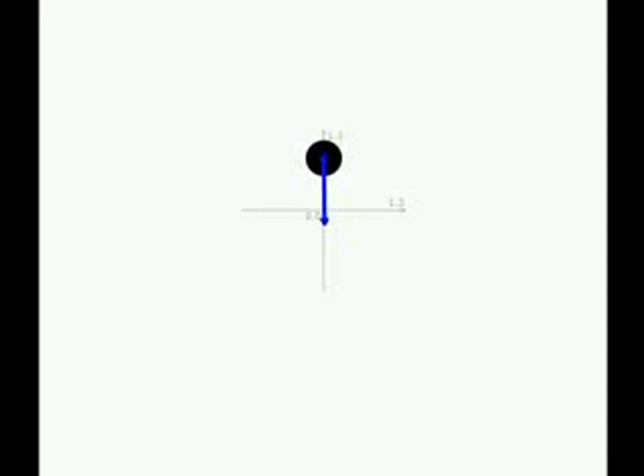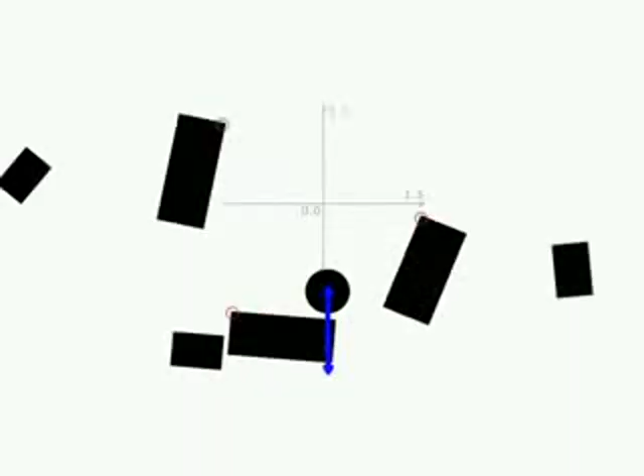Anything at an elevated height has gravitational potential energy. If it falls and none of the energy is used for other things along the way, all of that energy is converted into kinetic energy, the energy of motion, and we call it freefall. If any of the energy is used for other purposes, there will be less kinetic energy, so the fall will be slower. In the case of a falling building, the only way it can go into freefall is if an external force removes the supporting structure.

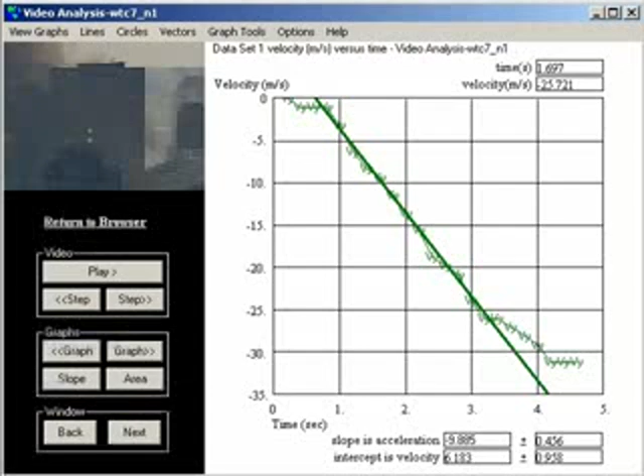None of the gravitational potential energy of the building is available for this purpose, or it would slow the fall of the building. The fact of freefall by itself is strong evidence of explosive demolition, but the evidence is even stronger than that. My original analysis looks like this. I have since confirmed my measurement using a different software package. Both of these graphs plot velocity versus time. A straight line indicates constant acceleration, and the slope of the line indicates the rate of acceleration.

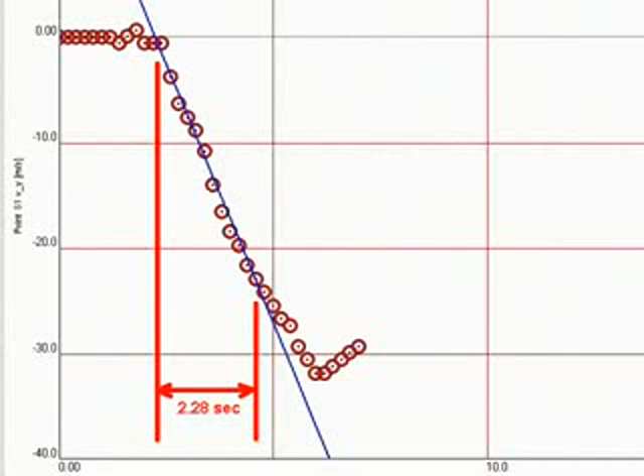What is particularly striking is the suddenness of onset of freefall. The acceleration doesn't build up gradually. The graph simply turns a corner. The building went from full support to zero support instantly. NIST's graph is upside down relative to mine, but that's really not an issue. Their data is almost the same.

What is dramatically different is the curve they superimpose on the data. This curve has no physical significance whatsoever. It is merely a hypothetical interpretation of the data. It is literally the mathematical equivalent of laying a wet noodle on the graph and nudging it around until it fits the data. The straight part fits the data reasonably well. What is totally misleading are the gradual transitions into and out of freefall. The raw data speaks for itself. One moment the building is holding, the next moment it lets go and is in complete freefall.

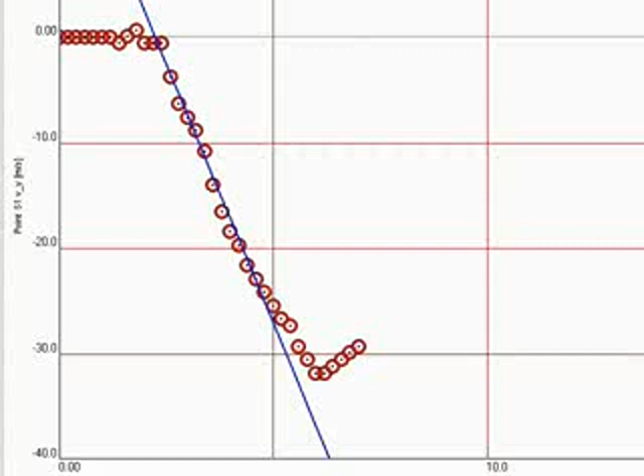The onset of freefall was not only sudden, it extended across the whole width of the building. My measurement of the acceleration of the building was based on the northwest corner. This recent measurement confirming freefall was based on a point midway along the roofline. The fact that the roof stayed level shows the building was in freefall across the entire width.

The collapse we see cannot be due to a column failure or a few column failures or a sequence of column failures. All 24 interior columns and 58 perimeter columns had to have been removed over the span of 8 floors low in the building simultaneously to within a small fraction of a second, and in such a way that the top half of the building remains intact and uncrumpled.

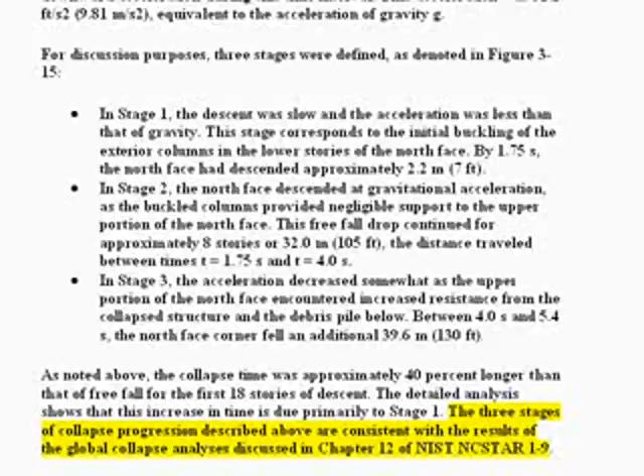Let's come back to NIST's acceptance of freefall. Here is their exact wording. Quote, "The 3 stages of collapse progression described above are consistent with the results of the global collapse analyses discussed in Chapter 12 of NIST NCSTAR 1-9," unquote. In other words, they're giving the appearance of claiming freefall is okay, but actually it's the 5.4 second duration of their 3-stage analysis that matches their model.

But we saw in Part 2 of this video series that the 5.4 seconds depends on an artificially early start time, which has no valid observational basis. Without the 5.4 second fig leaf, they are left with freefall and nothing more. NIST does not show how freefall is consistent with their hypothesis, because, as Shyam Sunder has correctly and eloquently explained, freefall for a naturally collapsing building is impossible.

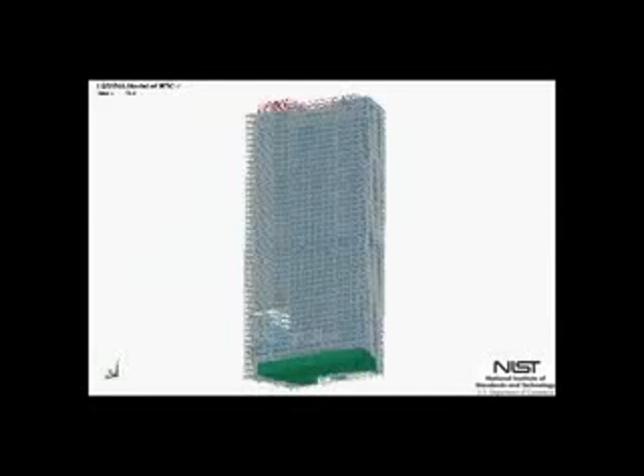This brings us to their computer model. NIST's so-called investigation actually consists of finding a way to reproduce the mysterious collapse of the building using a computer model.

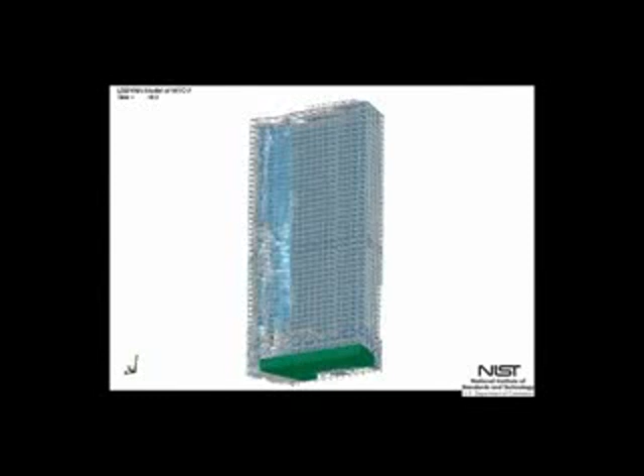The assumption is that if the computer model can be made to reproduce the observed collapse pattern, that must be how it happened. The problem is, if something unexpected was going on, like explosives for instance, you're not going to discover it in the computer model. For that, you need to look at the actual evidence.

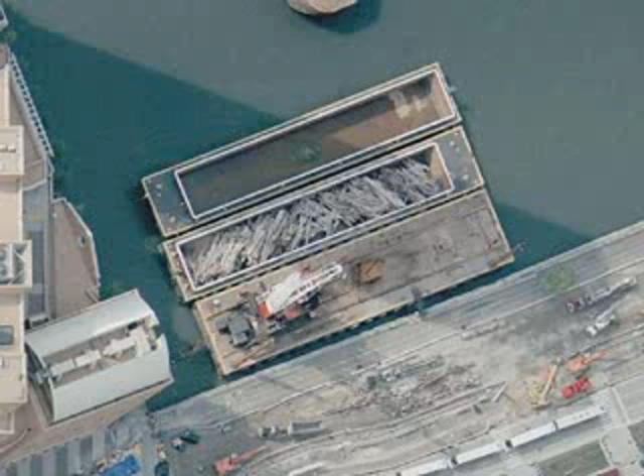So why not examine the steel directly? Oh yes, there isn't any. At least there isn't any after it was hauled away to Asia and melted down. NIST's investigation has been compared to conducting an autopsy without the corpse. As of 2005, NIST reported having only 236 pieces of steel from the World Trade Center complex, none of them unambiguously identified as being from World Trade Center 7.

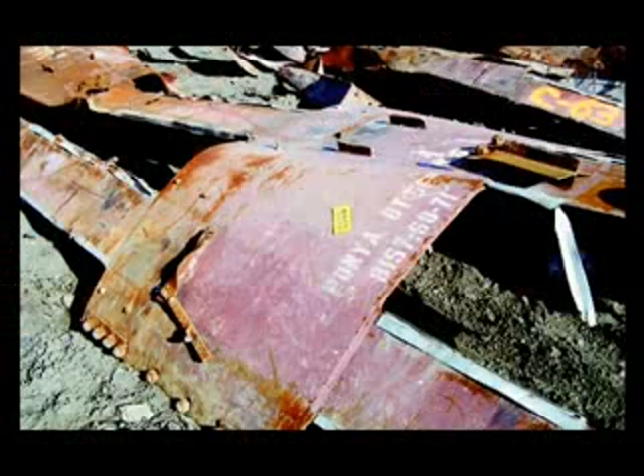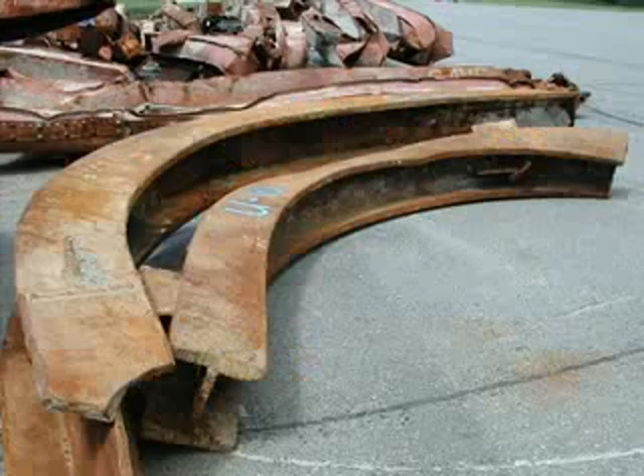We've all watched CSI. Anyone serious about solving a crime knows the importance of physical evidence. Yet here the crime scene was scrubbed, the evidence was destroyed, and the investigation was delayed for years. Destroying a crime scene is itself a criminal act. Destroying the steel has absolutely no justification except to cover up the cause of the collapse.

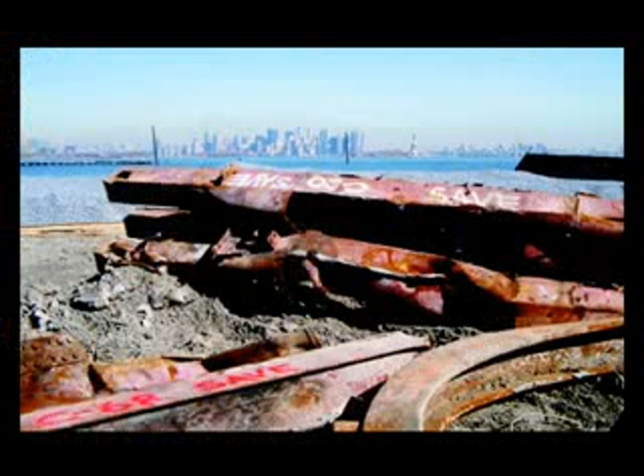So even if we knew nothing else about the events of that day, we can see immediately there was a cover-up. Knowing there was a cover-up is a strong indication there was a crime someone wanted covered up. Any investigation that does not acknowledge this basic fact is not really an investigation. It's an extension of the cover-up.

NIST claims their computer model can account for the observed phenomena. So let's look at NIST's model. Except we can't. The software they use to do the modeling is available, but their model actually consists of all the numbers and measurements and assumptions, together with any tweaks to the system they might have used to get it to come out the way they wanted.

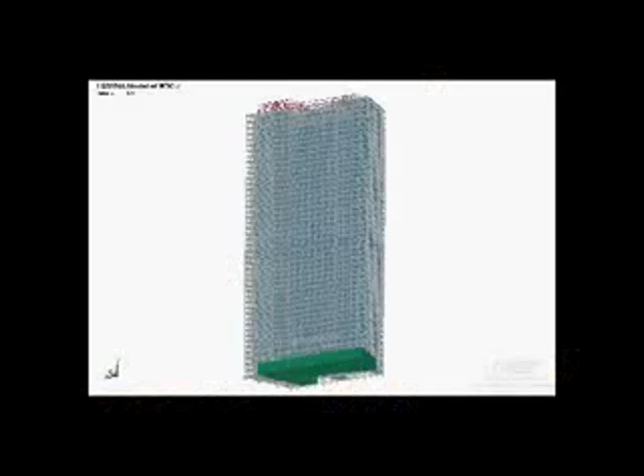If that information were released, their results could be checked by anyone with the appropriate skills and software tools. But NIST has not released the numbers. All we've been shown are some of the selected animated outputs they were able to get their model to produce. Is their model realistic? We don't know.

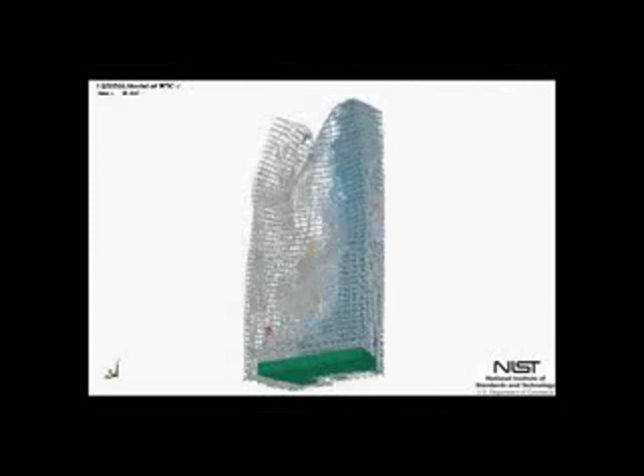Some models are chaotic in the mathematical sense. In other words, tiny variations in the inputs might result in wildly different outcomes. Is NIST's model stable or chaotic? Realistic or contrived? Honest or fraudulent? We don't know. We can't know without independent testing.

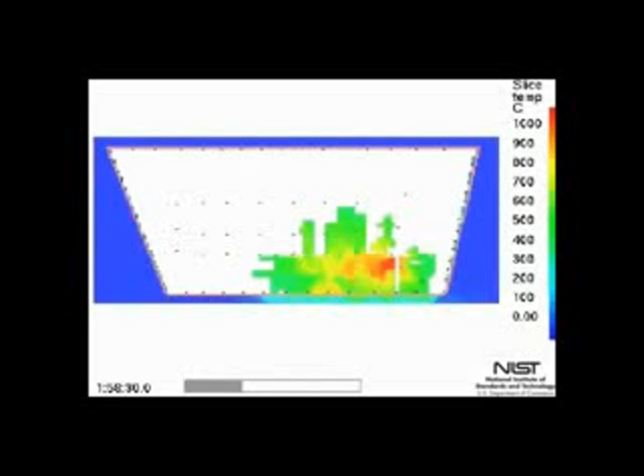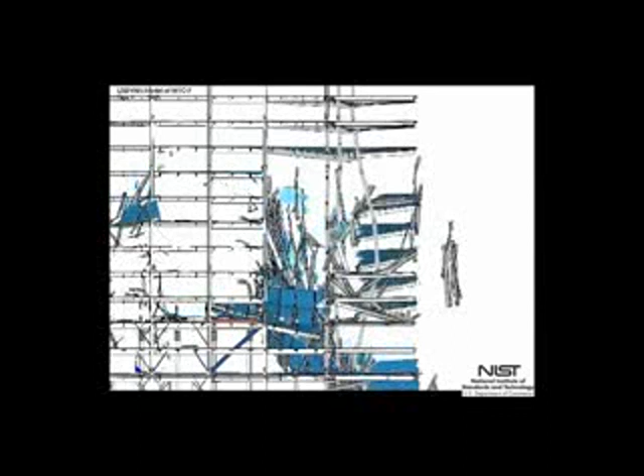The very process of running the model until it produces the kind of result you're looking for is called selection bias. If you think about it, NIST's methodology is explicitly based on selection bias. Even if you could show what might have happened, it doesn't show what actually did happen. The very fact that NIST has not released their model strongly suggests they don't want their results checked. In other words, their results are intended to be taken strictly on faith.

If NIST has not released their modeling data and their assumptions, they have really not released their report. And the fact that this is their final report indicates they do not intend to do so. Therefore, on the face of it, their report is little more than a fancy, expensive cover-up.

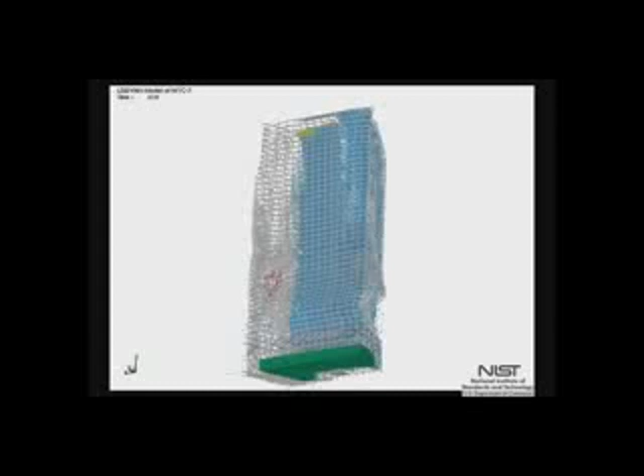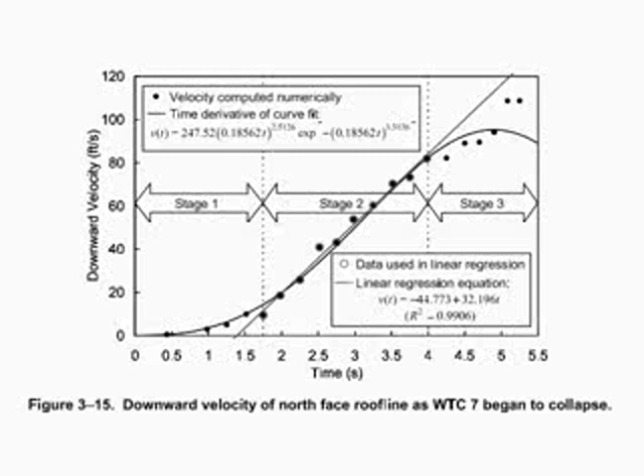One fact we do know about NIST's model is it does not allow for freefall. The best they could do is 5.4 seconds for the building to crumple down through 18 floors. Crumpling absorbs energy, and that makes freefall impossible. There's nothing in the models we have been shown that even resembles a three-stage collapse with a freefall component. After all, as Shyam Sunder put it himself, freefall happens only when there are no structural components below the falling section of the building. Any natural scenario is going to involve a progression of failures, and these don't happen instantaneously.

So, in the end, we come back to where we were in the beginning. On first impression, we were looking at a classic controlled demolition. NIST claimed to have found a way it could have happened naturally, but in fact, they failed. The only way they can support their claim is through lies, secrecy, and pompous but false pronouncements. That constitutes a failed agenda. Explosive demolition is the only scenario that has been put forward that could actually account for the observations.

Where does that leave us? We have a building that underwent directly observable and now officially acknowledged freefall, with no plausible mechanisms other than explosive demolition. We have an official investigation by a government agency that has fraudulently manipulated data, has refused to even consider existing physical evidence that explosives were used.

They have wrapped themselves and their data in secrecy and offered up pronouncements as conclusions to be taken on faith. The NIST investigation is a fraud and a farce. We need a new, fully empowered, truly independent, and open investigation.